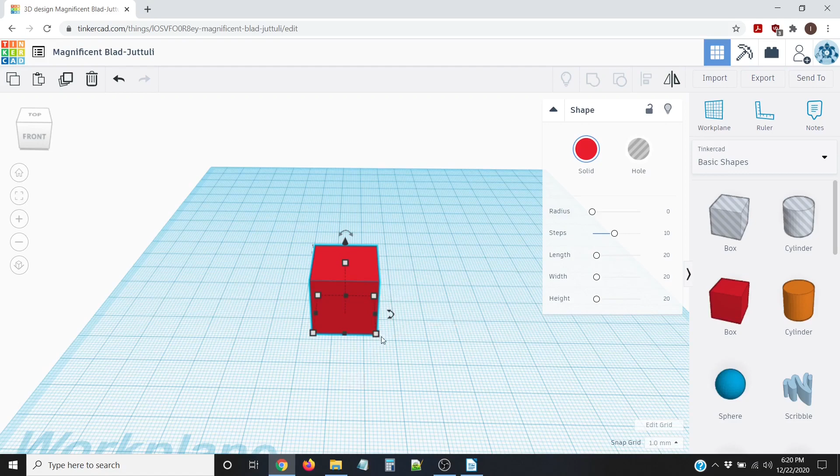This is where you take your shape like that from here and you just drag it over to the work plane. And once you have it on the work plane, you can manipulate the size of it and different parameters like that. So you can actually bring it out like that. You can increase the size going up in the Z height direction like that, and grab it like this to take it up in the work plane area, and so forth. Then if you want to get rid of that, you just make sure that object is highlighted and click delete on your keyboard.

Some of the other tools over here: there's a home button. So let's say you've got the sphere and you're zoomed in really closely to the sphere, you can click on the home button to actually zoom out to a home view. That's going to basically just recenter everything for you.

You also have this view cube that you can click to change your viewpoints all around. There's a zoom function right here. But you can also use your mouse, which you will definitely want to use here in TinkerCAD to create your models. It'll definitely be frustrating if you try to use the little touchpad if you've got a laptop. It's definitely going to be a lot harder to make a model using that. So I'd recommend having a mouse.

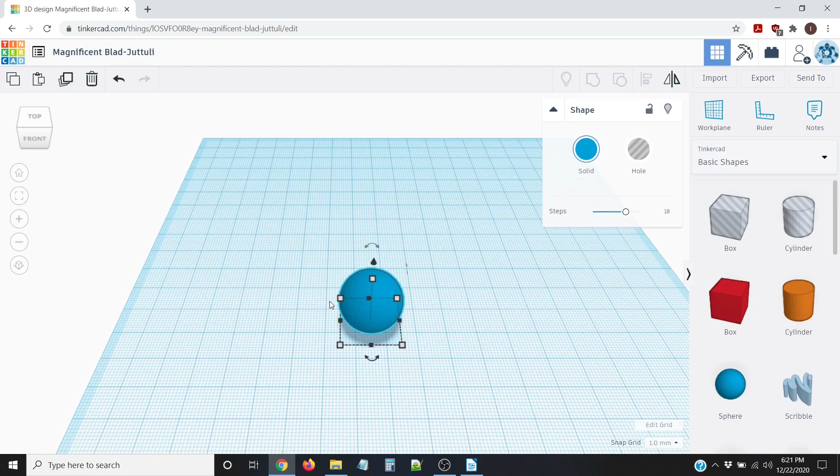But anyway, to zoom in and out, you want to use that middle scroll wheel on your mouse, pushing it forward to zoom in, and then pushing it backward to zoom out. Then the rightmost button on your mouse is basically like a panning tool, so you can pan around your model itself. If you click that middle scroll wheel, you can actually click on the work plane area. You get a panning from left to right sort of tool option right there.

The leftmost button on your mouse is actually what you're going to use to highlight items to group them together. So I will use this right now to show you. I'm going to use my left mouse button right there, and that's highlighted. I'll show you in the later part of the video how all these tools are used. But like I said, this is just a refresher if you haven't used TinkerCAD in a while.

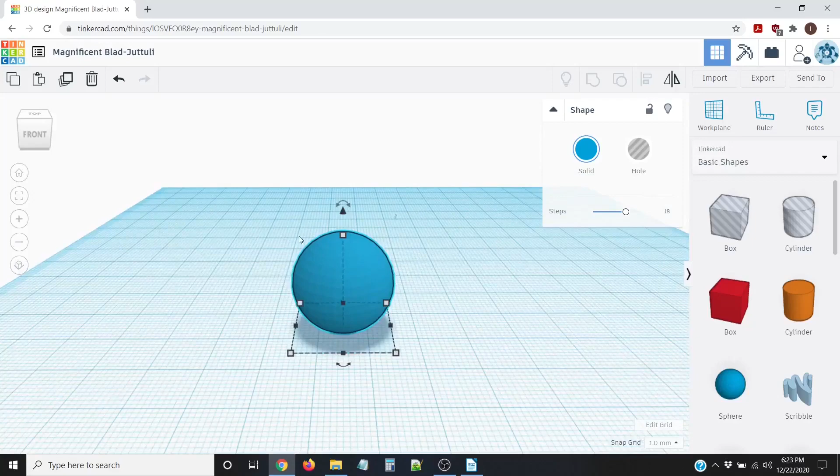And there's other tools that I'm going to use in the video that I'll slightly explain as I go through the modeling, but I'm not going to spend too much time going over the interface. I would recommend, like I said before, checking out that first video we made in December, just to get a good overview of all the tools, since there's definitely a lot of them at your disposal.

All right, so the first thing that we're going to do is 3D model a customizable name tag that can be 3D printed out. So this will be super fun, and you can get really creative with it. And I'm going to show you another option in the later part of this first tutorial using what's called the shape generators, which is over here. You've got your basic shapes. It's under shape generators, and it is the US states tool. And I'll show you how to make a customizable keychain with the state of Montana as the base for your keychain.

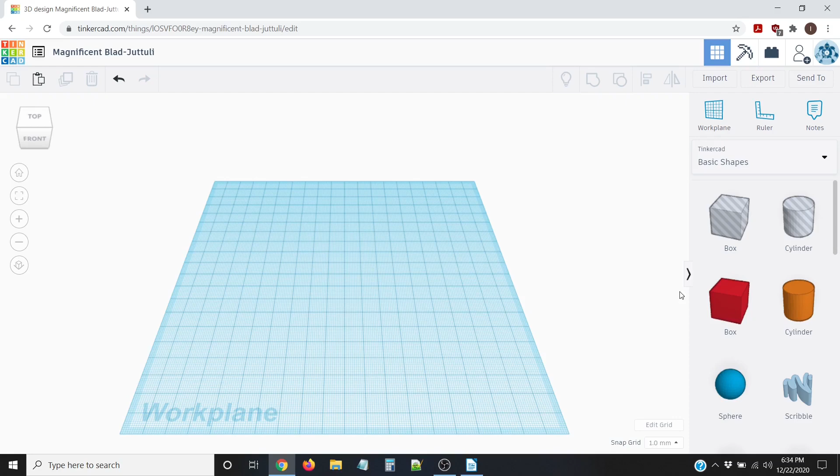All right, so before getting into the box modeling, I do want to go over one thing if you haven't modeled in TinkerCAD before, or if it's been a while: you want to use millimeters, or the metric system, when modeling. And actually, TinkerCAD defaults to that. So we're going to grab a box, bring it over to the work plane, and I'll show you what I'm talking about. This box is in millimeters, so it's 20 millimeters going this way, 20 millimeters going that way, and 20 millimeters in height going like this.

You can change this to inches if you want by clicking the Edit Grid tool down here, and then you can change your default units from millimeters to inches. I would definitely recommend, if you're going to 3D print what you're making, to keep your units in millimeters, because most 3D printers that I've worked with and that are on the market today use the metric system for their build plate area. So it's just a lot easier to do modeling in metric for 3D printing, and it's the standard for a lot of the machines that have come out of Europe and stuff.

So I would recommend staying in the metric system through this modeling exercise and anything you do in TinkerCAD. It'll just be a lot easier in terms of trying to 3D print it with the right dimensions in the future. All right, so now on to the modeling exercise itself.

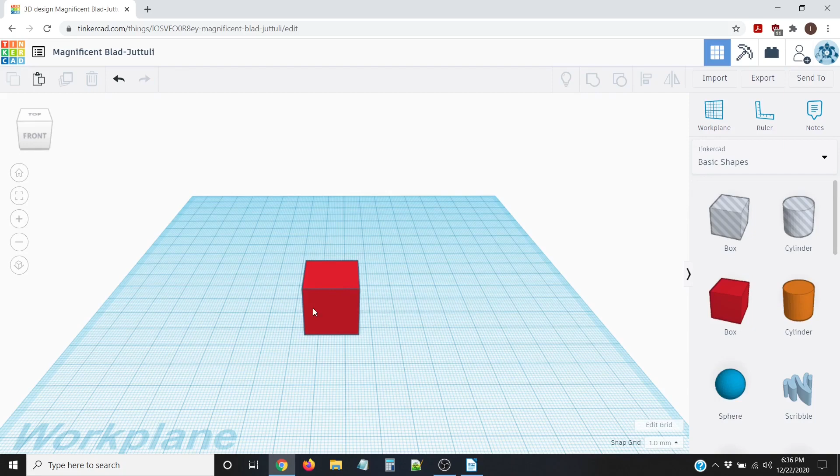I'm going to zoom in, and like we had done before, I had grabbed the box tool, moved it over to the work plane. I'm going to click on this, and I actually want to change the size of the box itself to basically mirror what a keychain would look like that you would find at any store. So what I'm going to do is change the sizing going this way to 70 millimeters. So all you got to do is click on this box and type in 70, hit enter.

I'm going to move this over a little bit using my left mouse button. You can move your object around the plane like that. And what I'm going to do now is change the size of this model going this way to, looks like 30 millimeters. I'm just going to type in 30, hit enter.

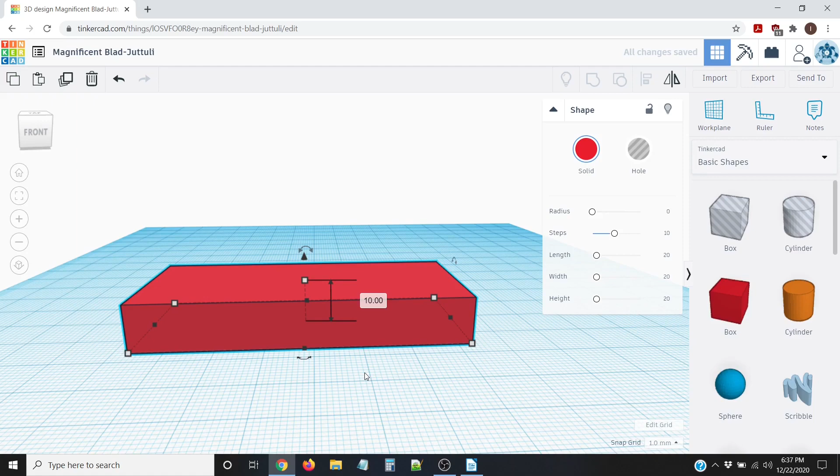And now I want to change the height of the model itself. Right now it's at 20 millimeters. If you click on that, that gives you that value right there. I'm going to click on that, and I'm going to change that to 10 millimeters. Hit enter. All right. So now I actually want to make a copy of this box and take the copy and turn it into a hole. I'll show you how to do that.

We're going to zoom out. Make sure this is highlighted, and it is, with my left mouse button clicked on it. And we're going to use the tool called Duplicate and Repeat. So you can click that tool to duplicate and repeat this model. What you can also do is use the keyboard shortcut Control D, which I'm going to do.

I'm going to rechange my view right now. I'm going to use my right mouse button and kind of move this up like that. And I'm going to do Control D on my keyboard. And so a copy has been created, and I'm going to use the arrow keys on my keyboard to move this copy just slightly out of the way. I'm going to use the rightmost arrow key, move it out like that. Now what I want to do is turn this into a hole. So I just need to click on hole.

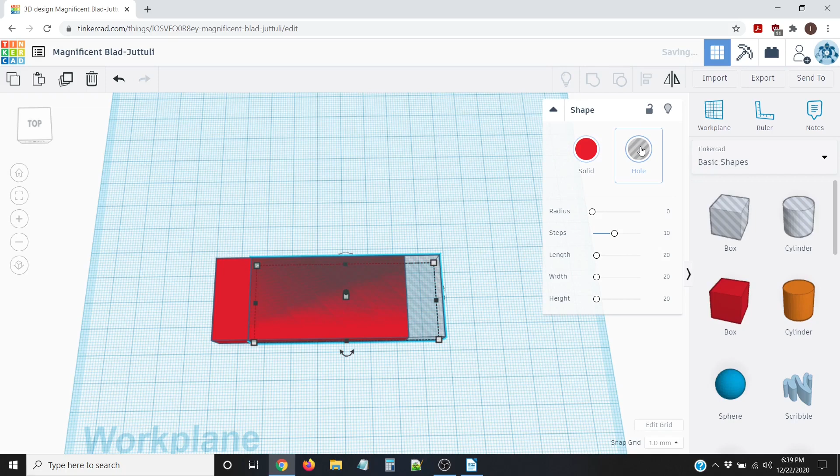Okay, so now we're going to move this box that we turned into a hole just over to the side like that. Now we want to change the proportions of this and actually round off the edges. What we're going to do is use these tools up here to do that. To round out the edges of the box, I'm going to change this radius up here from 0 to 5. I just click on that, type in 5 like that. And now you can see it's more of a rounded out shape, more like a keychain that you would find for sale at any grocery store.

Right, so now what I want to do is take this box that's a hole, and change the size as well as the radius. I'm going to change the radius from 0 to 3, and I want to change the size ever so slightly. I'm going to change it down from 70 to 60. I'm going to change this length to 20 millimeters, hit enter.

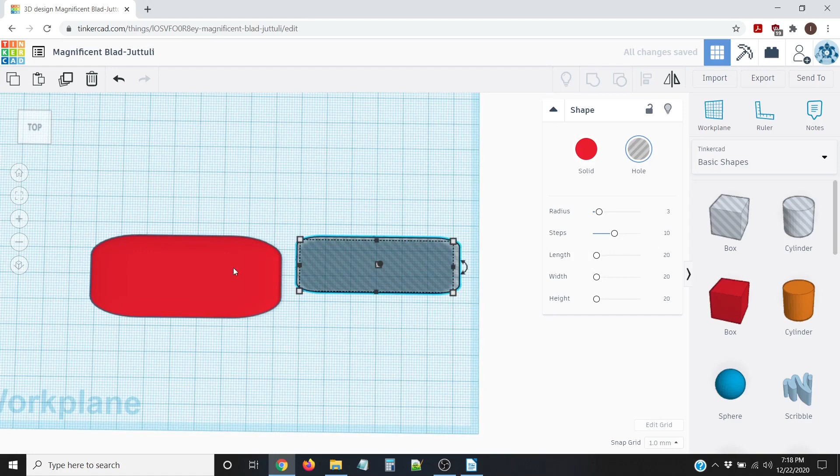And then I want to align these two together, so I can basically line this up and have this cut into this. So I'm going to highlight both of these. I'm going to use my align tool up here to align the shapes. I'll click that. And I want them aligned by clicking right there, like that. And then I want them aligned going this way, clicking right there on that model.

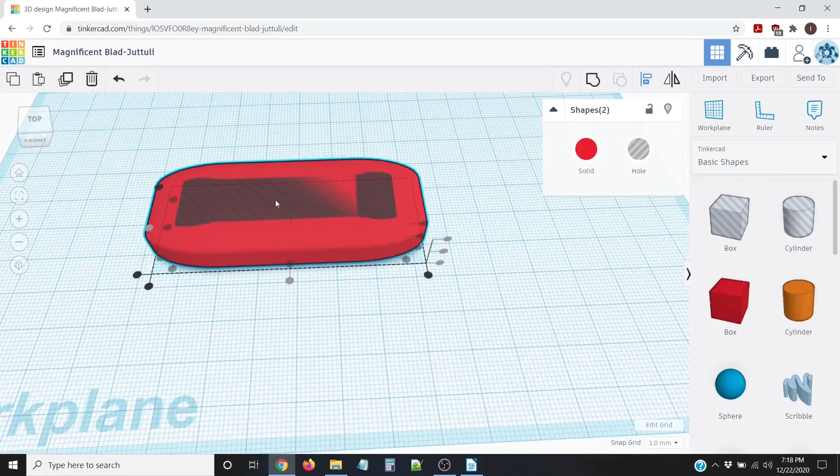And then if I click right there, that little align tool, that will align this to the middle of this. So click that. So now that's aligned, and it looks like we will actually want to change the size of this. I'm going to click out on this side to get out of the align tool. And I'm going to click on the hole box right there. I'm just going to change this size a little bit. I'm going to change it to, let's see, 65.

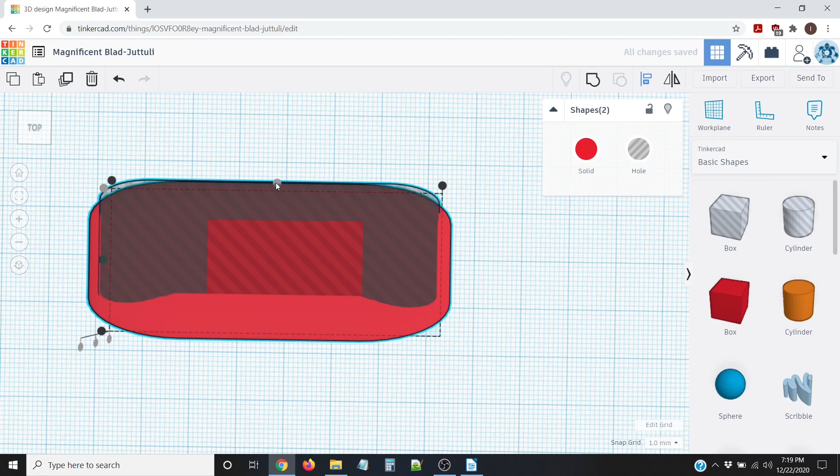Tab over, you can click the tab key on your keyboard and then change this size right here to, let's see, I'll do 25. Let's see if that works. I'm going to realign these as well. Let's see if this will fit. So I'm going to highlight both of these, click the align tool, I'm going to align them, clicking right there, and then clicking the middle button right there. So this hole should be aligned to the middle of this.

So now, you can kind of see what's going to happen: this hole is going to cut through this outer shape that we made. It's going to actually cut through the bottom, as you can see. If you scroll down this way, below the work plane area, you can see that. What we want to do is just slightly move this hole object up a little bit in space so it doesn't cut all the way through the bottom of this object.

I'm going to zoom out just slightly. I'm going to grab this triangle tool right there and just move it up ever so slightly, a couple millimeters. Let's go to 3 millimeters. Now I want to check the bottom of this and see if it's going to cut through. I don't think it's going to cut through. It looks like it might. We'll try it out and see how it works.

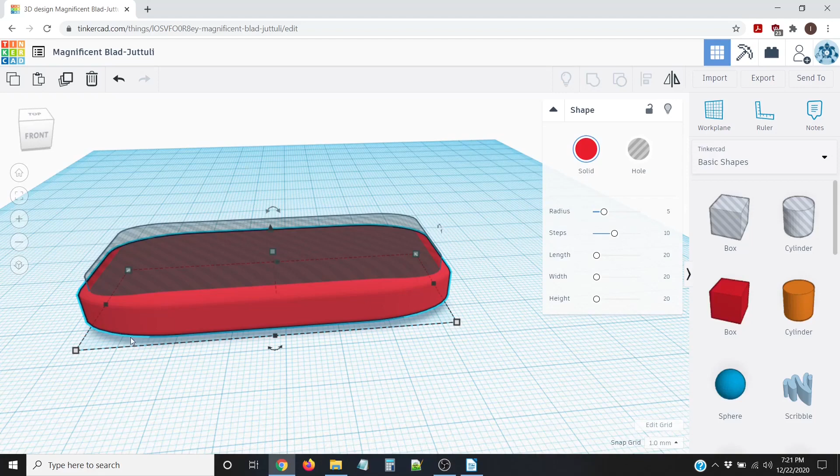So now we want to group these and see if this hole shape right there is cutting through the bottom of this. So I'm going to highlight them both, click on group, and as you can see, it actually did not cut through the bottom of that. So that's actually pretty good, but it's leaving a little bit more of a hole in there than I want. So I'm going to click on undo. And I'm going to click on this and move this up just a little bit more, so it's going above this object.

Now I just kind of want it to cut into this object or merge into it just by a few millimeters. So I'm just going to take this, move it down ever so slightly, going a few increments of -1 millimeter each. And I think this should actually work going to -3. Look at that. The height of this is 10 millimeters, so it's just going to be cutting into this by 3. So that should probably work for our purposes.

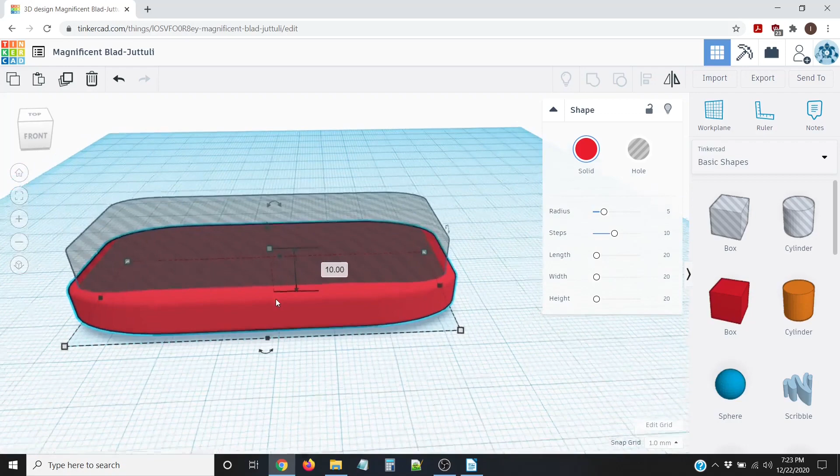So now I'm going to highlight this again. I'm going to group them. So they're highlighted, click on group. Now as you can see, the hole into this is not as deep as it was previously. So that should really work well for a name tag.

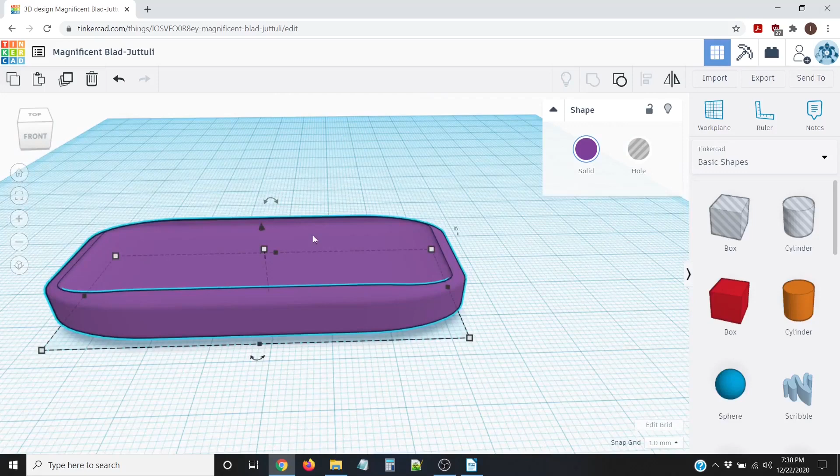Now I'm going to change the color of this to see a little bit more of the contrast inside there. So from red to, we'll try this purple right there. I guess it didn't really change it too much, but you can kind of get the idea of the hole that we made of that box cut into this.

So now we want to customize this by adding text to this area in here. We can do that with a tool called the text tool, which is over here under basic shapes. It's this tool right here. There's also a couple other text tools you can use. If you click on this drop-down menu, go down to the shape generators and click on all. On page number 2, you have a couple other text tools: custom font text, script text, and a text ring that basically creates text in a ring around a model. So that's another option for using text in Tinkercad.

I'm just going to go back up to basic shapes. I'm going to use the text tool in this area. I'm just going to grab this, move it over here. So as you can see, when it gets brought over to the work plane, it's actually pretty big, so we're going to have to resize it. First, I'm going to change the text itself. I'm going to change it to my name for today's purpose. My first name is Ira. I'm going to do IRA, like that.

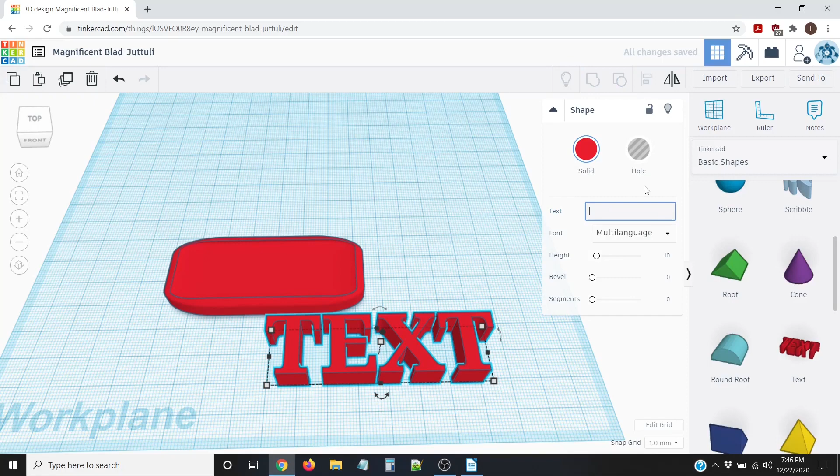Right here you can see you can change the font. So right now it's under what's called multi-language. You can see what all of these look like just simply by clicking down here and seeing how it changes the font. And yeah, that's what it looks like. So I'm going to go with the serif. I kind of like that. It's like an old school looking font that works well for this.

So now what I want to do is align this text to that, and I'm going to have to resize it as well. We'll first align it. So I'm going to just move this up like this using my left mouse button, and then I'll move it over to this area where this model's at. And then I'm going to use the align tool from there. So I'm going to highlight these both.

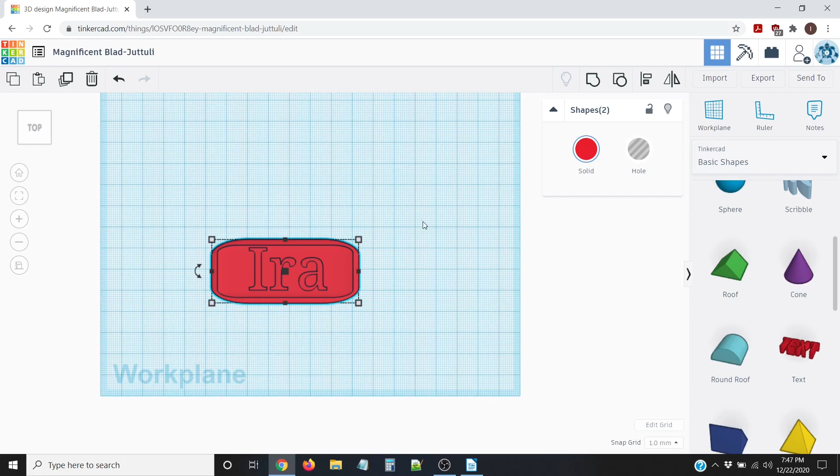To resize my view, I'm going to click over here on the top view. One thing that I found too is that you can switch your perspective views, so I'll switch it to a flat view called orthographic. That's really good for lining up different elements that you're combining together. And you can actually see what it looks like. It's kind of weird looking initially, like I wouldn't probably generally model in this view type just because it's less normal or intuitive to me, but it's really good for lining up things like text or different objects together. We can get out of that view by clicking over here to perspective view. Click that, and that just gets you back to the basic 3D modeling perspective view.

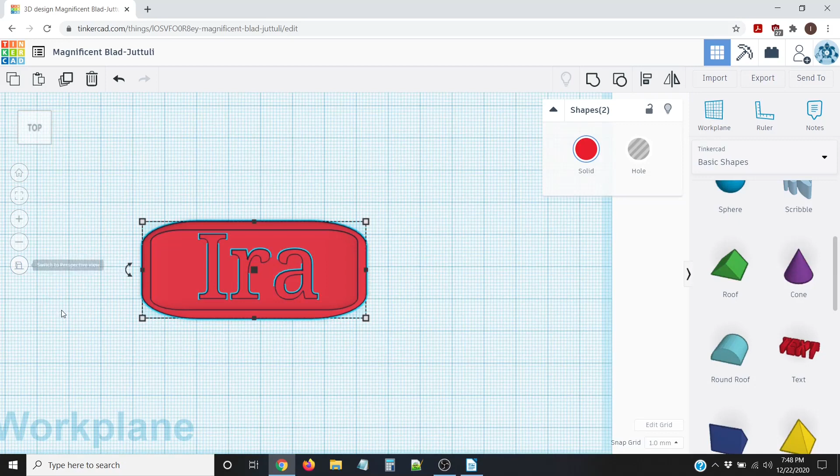So now what I'm going to do is click this top view cube button right there. I'm going to click into the flat view. And now what I want to do is highlight these both, go up to the align tool, and make sure this text is nicely aligned to this larger model. So I'm going to click over here to align it this way, and then click it right there to align it to the middle of this going that way. So that looks good right now.

So basically what we can do is merge this text into this model, or I can actually have it cut it out. First, what I want to do though is change the color of both of these just to give a better visual contrast.

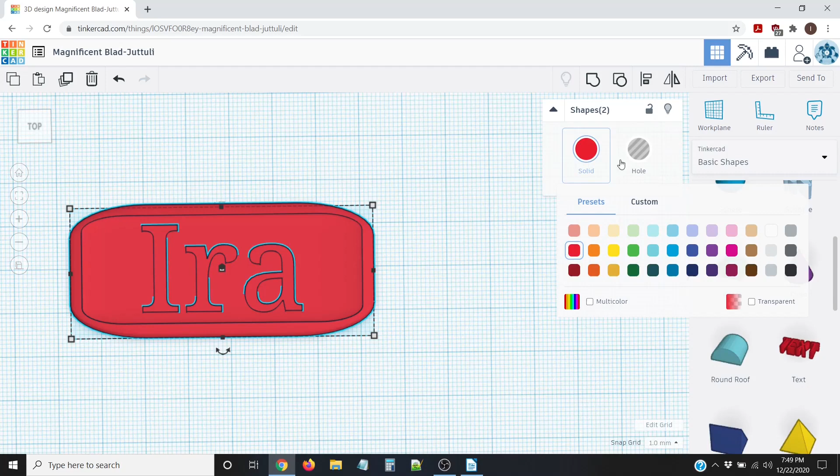I'm going to click on solid right there. I'm going to change these to like a lighter blue. And now what I can do is zoom in like this, and you can actually see that this model is just slightly merging with this, but I think it's actually cutting through down the bottom here. I'm actually going to change my view back to perspective, and I'm going to pan over like this.

Actually, I think what I'm going to do to give both of these a different contrast is change the color of the text. So I'm going to click on the text, change it to, I'll just do black. And now we can see, I'll click on this, you can see by using this triangle tool, you can merge the text into the model like that. And you can actually have it basically cut through the bottom if you'd like.

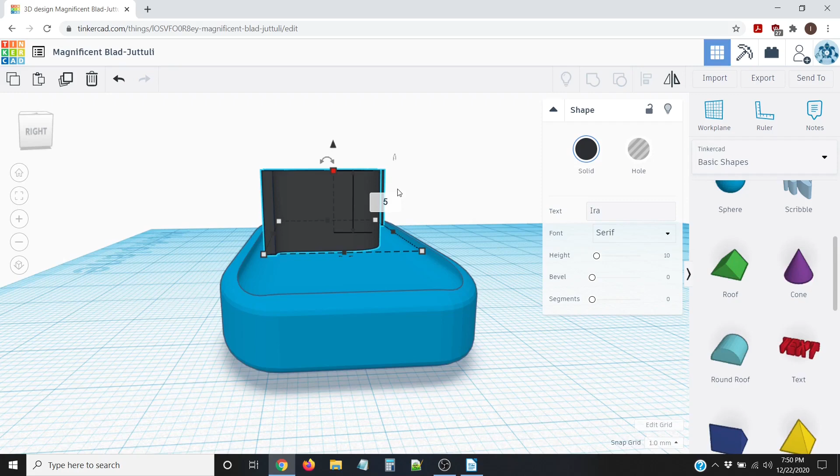What I'm going to do is resize this text by moving it up like this, clicking this, and make it, let's say 5 millimeters in size. You can even do, let's do 3. Hit enter. And now I'm just going to slightly move it down until it basically starts merging with this part of the model. You can zoom in to get an even closer perspective on it.

And we'll see, it's still on the top of the model, hasn't merged yet like that. But if I just push this down one more, so now it's merged with this model. We can zoom out, pan over like this, zoom back out again, and let's combine these two.

So I will highlight these both. I'm going to combine them by grouping them. So I'm going to click on group. And now they're grouped as one shape. So when this is 3D printed, it's all going to be printed as one shape.

Now I'm actually going to show you how you can create the text as a hole, or turn the text into a hole, so it actually gives you kind of like an imprinted look into this model.

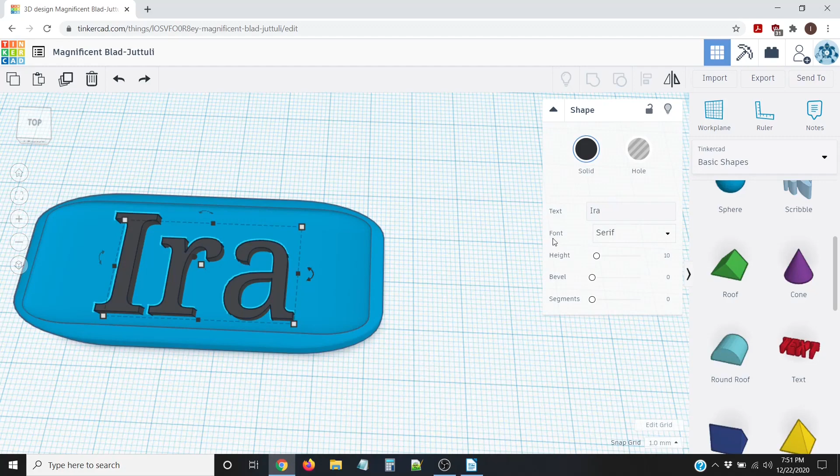So to do that, I'm just going to click on the undo tool. So now they're two separate objects. They're not merged, they're not grouped. I'm going to click on that text and make it a hole.

Now what this is going to do, once I group these, is show that this text is cutting into this model. And I'll show you what it looks like. It's actually really cool. We'll highlight these both and click on group. As you can see, the effect is it's cutting into that model itself, and it will 3D print like that and should look pretty good. It's kind of a cool visual effect.

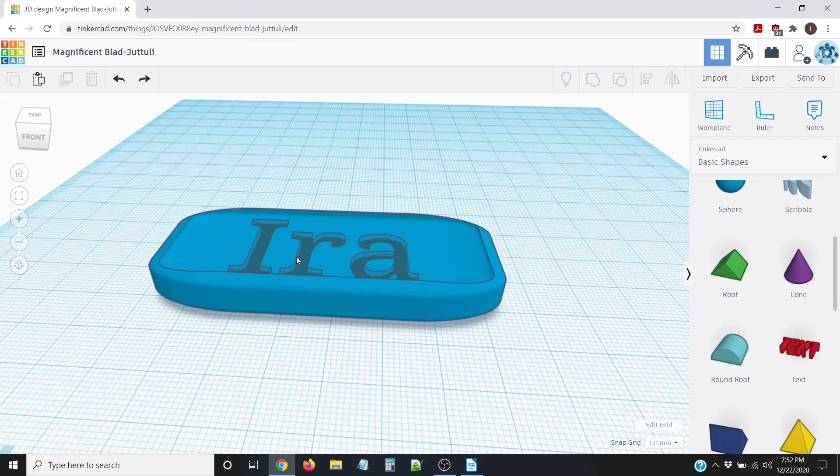So that's another option for merging text into your models. What I'm going to do though is undo this, and instead have the text move up in space from this model, giving you the visual effect that it's popping up from the model.

So I just did the undo button. I'm going to click undo again, and then undo one more time. So now we're back to the same model we had before, where this text is merged in with this model, so it looks like it's popping up from it.

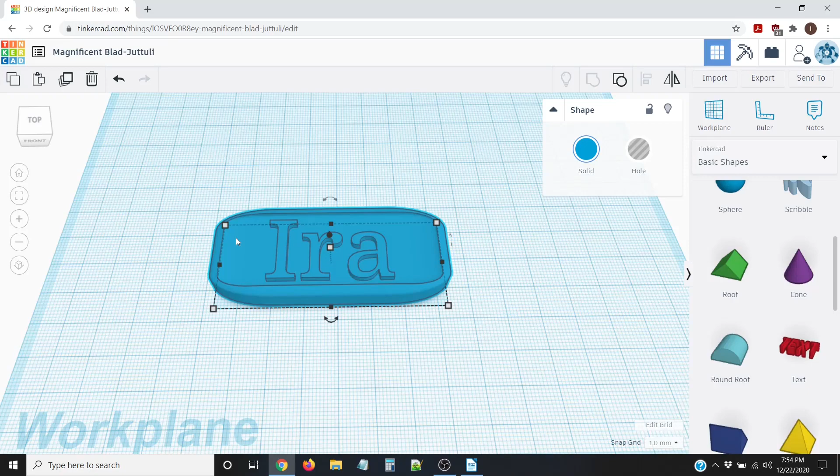So what we're going to do is highlight these both and group them again. You can see right now they're made up of two shapes, so we'll group them, and now they're merged as one. For the final step, we want to create a little circular hole in order to use this name tag to hang up on things, or add it to a keychain, or any sort of thing you want to personalize and hook this name tag onto.

So we'll click off of the model on the work plane. We're going to move over here to the basic shapes we've been using, and look for the torus tool. You can also use the tube tool for this, but I'm going to use the torus tool.

I'm going to move this over like this. I'm going to change my perspective with the view cube to top, and actually change my perspective to the flat, or orthographic, view. Click on that, and click on the outside like that. I basically want to align this to that, so it lines up perfectly.

So I'm going to highlight these both and click on the align tool up here. I just want it to basically align along that part of the plane. So I'll click on that, and it's aligned right there.

Now what we'll do is I'm going to click on this. I'm just going to change the color of it to make it easier for me to see as I'm merging the models. I'll change it to, I guess, brown. And I'm going to zoom in, using my middle mouse button to pan over slightly.

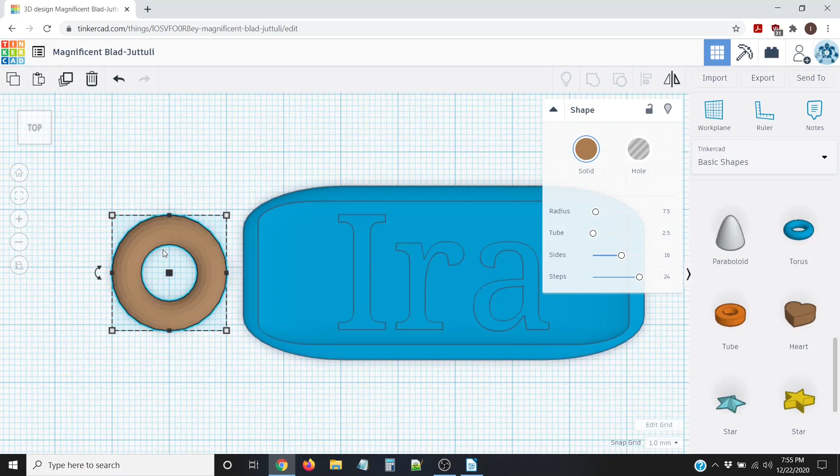I'm going to use my right arrow key on my keyboard to push this in like this, just so it's slightly merging. Now I'm going to use my right mouse button to pan over like that. I basically just want to use the upward key on my keyboard to push this model in ever so slightly, just more into this model. So just like that.

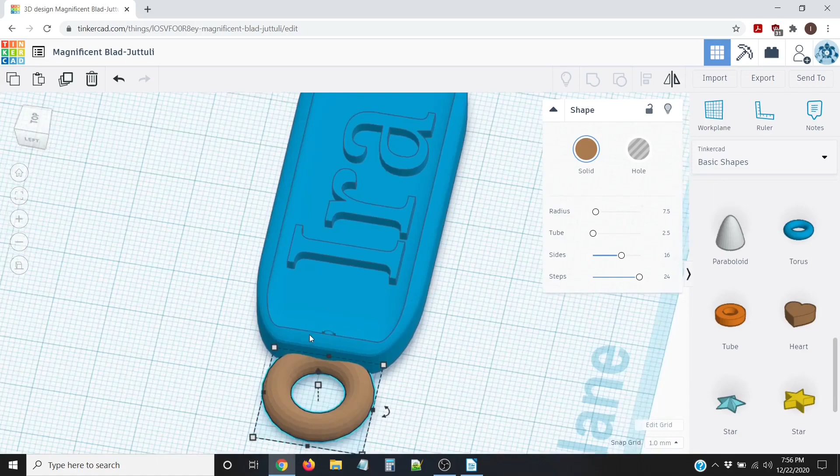You basically just want these two to merge together, so when they're grouped and then exported out to get 3D printed, they will actually print as one object, so this won't be a separate thing printed off from this. If that happened, you'd just have a failed print. So that looks good, pretty well merged into this.

What I can do, if I want to move this in even more but not in such large steps, right now it's going in increments of 1 millimeter inward. I can change the snap grid tool to 0.1 millimeter, which gives me a bit more finite control of my movements. So if I press the upward key on my keyboard, you can see it's just slightly going into that model more.

So now I'm going to change my view up again, zoom out, and switch my view to the perspective view.

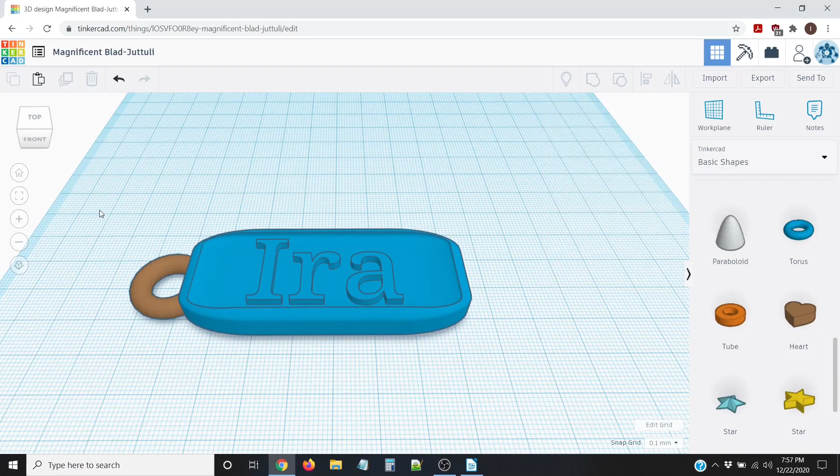Use my middle scroller mouse button, click down on it, and move this over to slightly pan. Then I'm going to highlight these both. I'm going to click on the group tool, and now both of these are grouped.

What you have now can be exported out as a STL file, which is what our 3D printers like to take as the file type. This should print out very well on our 3D printers. You can customize your name tags with all sorts of text to make it customizable for yourself or your friends.

And then this little Torus tool that we used right there, that we merged with this model, you can use that to actually clip onto a keychain or hook onto whatever else that you like.

One thing to note too, when you're grouping objects together and they're different colors, if you haven't watched that previous TinkerCAD video, I'll mention it now: any color that you choose to make your solid shapes in TinkerCAD is not going to affect the color that it's 3D printed in. When you export these files to get 3D printed, all it's taking is basically the information about the shape and text as part of the model. It's not taking into account the color of the model itself that you made in TinkerCAD. It actually can't handle that type of information, unfortunately.

So our 3D printers would not be able to understand that you exported this out as a blue color. You would actually just have to let me know that when you send me the file through email to have me print it for you.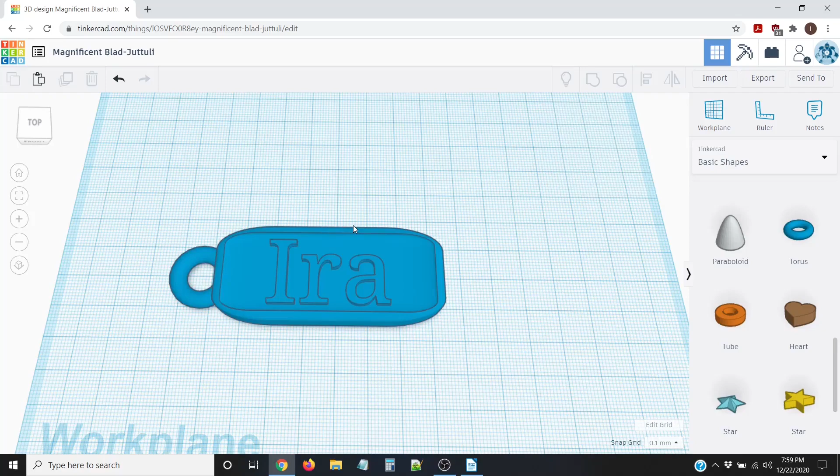So when you're happy with your model, which I am with this, it's super simple, but it should print really well. What I can do now is highlight this, click on it with my left mouse button, click on the export tool, and basically I want to choose the selected shape.

That's selected, and I want to choose the STL file format. That's really the most popular file format that our 3D printers can take to print out. So I would click on STL file, save it, and import it into the 3D slicing program, which is the program we use to load in files and set them up for 3D printing.

Before we move on to the next portion of this tutorial, I also want to note that up here, if you haven't played around in TinkerCAD before, this is where you can rename your models. Anytime you create a new model in TinkerCAD, it's going to give you its own made-up name, so you can click up here and change that to whatever you'd like. I'm going to call mine Ira name tag.

Once you click export and export it as an STL file type, it's actually going to save as the name of the model that you called it. So it's super helpful, especially if you're working on tons of different models and want to keep track of all the things you're creating.

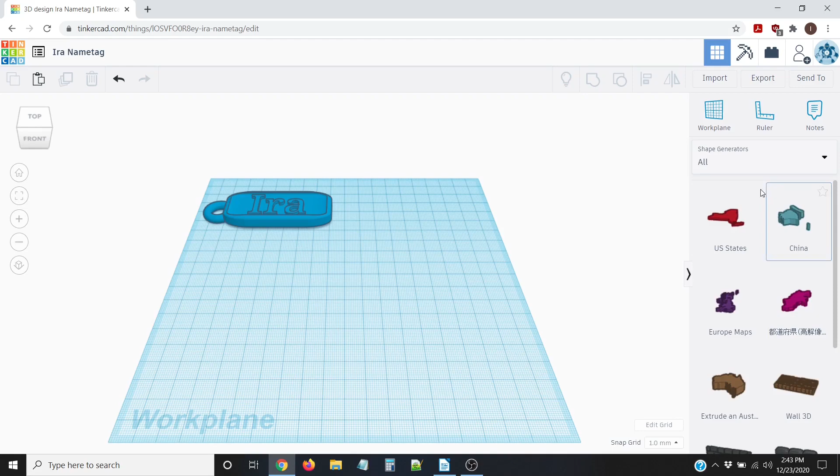For the next name tag model, or keychain name tag, we're actually going to get out of the basic shapes and go to a special area called shape generators, which are made by users of TinkerCAD and the company that created TinkerCAD. They've got a really cool set of shapes of US states.

So if I grab that shape right there, you'll see it's the shape of New York State. I'll click this and go down to Montana right there. As you can see, that is the state of Montana where we live. I'm going to choose the top view up here.

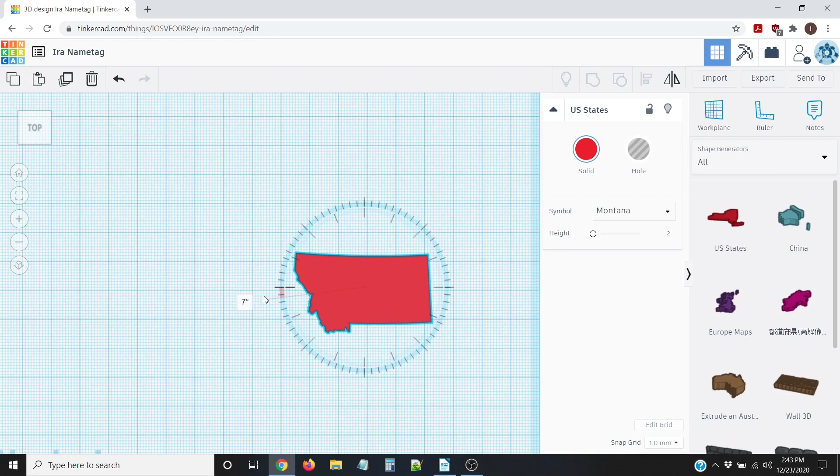What I want to do is use this rotate tool to rotate it around, but not the rotate tool where I've got my mouse pointer, because it's a fixed grid of 22.5-degree angles that it moves at. What I can do is click this and move outside of that area to rotate at free-handed angles. So I'm just going to change this so it's more left to right, straight on. And then I'm going to change my view from the regular perspective view to orthographic.

And what I'm going to do is I want to make this bigger, but I actually want to keep the proportions of this model. So I'm going to click first Shift on my keyboard, and then I'm going to click down here on that box, and I'm going to move this model out like that. And I don't have a particular size in mind. I'm just going to go to kind of where I like it. So I like this size for this model.

That looks pretty cool. So now I'm going to move back to the perspective view, and I'm going to go up like this using my right mouse button, and I'm going to zoom back out. And I want to kind of figure out either if I want to use text or numbers on this. And I think what I'm going to do is I'm going to put the number 406 on top of the state of Montana. That's our area code.

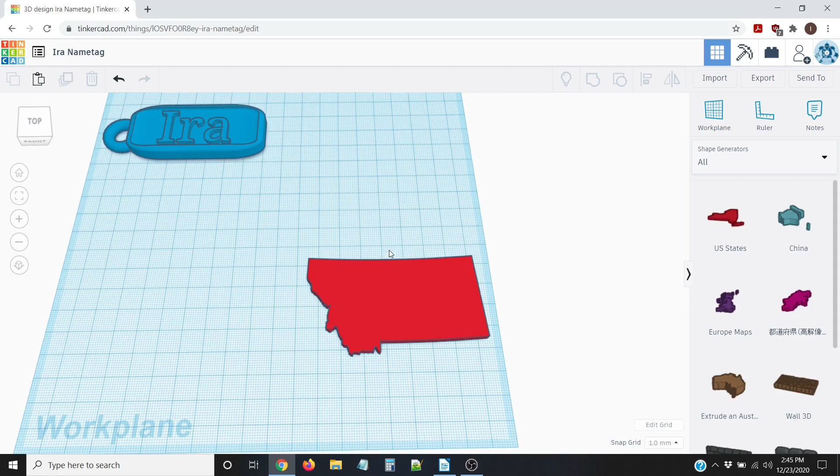If you use a phone, that is our area code. If you've got family from out of the state and they want to call us, they got to use the area code 406, which is our phone number area code. So I'm going to put that on top of this. And then after that, I'm going to put a little circular thing up there so it can actually be hung, either as a keychain or maybe you can have it as an ornament or something like that.

So now what I'm going to do is I'm going to get out of the shape generators area. I'm going to go back up to around near basic shapes and go to text and numbers. And I'm going to use this text tool. Right here you can do individual letters and numbers, but I found that using the text tool itself actually is a bit quicker. So I'm going to grab the text tool, move it over right there, put it on top of the state of Montana.

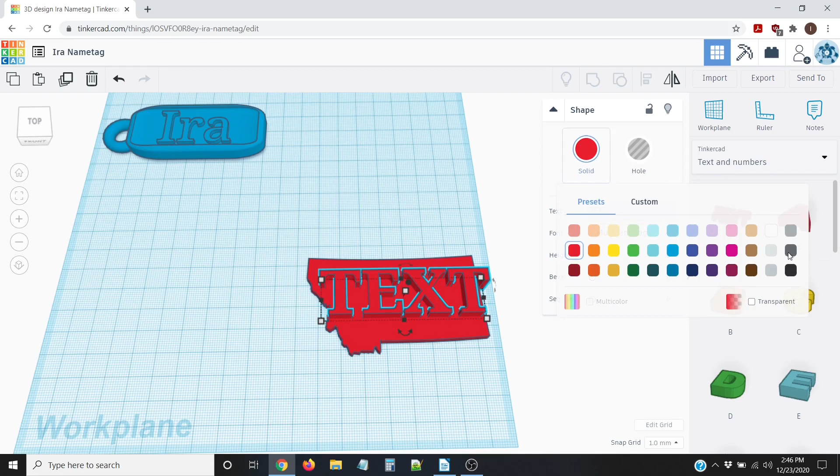And I'm going to change the color just so I can see a better contrast between the two models. Change it, I'll do a light blue. So now what I want to do is change the text from saying text to 406 for the state. And I like how that's looking. I'm going to change the size of it by clicking right there, and I'm going to make it 5 millimeters just by typing in 5, hitting enter on that.

And what I want to do actually is I want to try to center this onto this model. It looks pretty centered, but it might need a little bit more work. So I'm going to highlight these both, go up to the align tool, and click this to align it, and then click this to align it. And so that is relatively aligned to the middle, even though maybe it doesn't look like it, but that looks good to me.

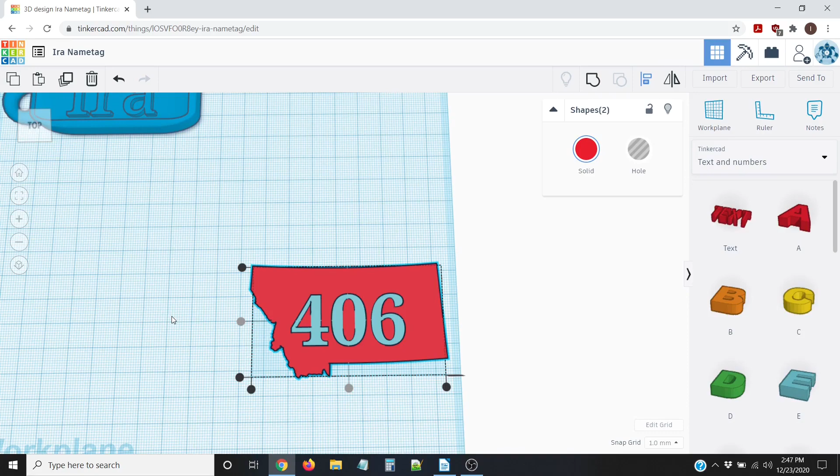So the next step I'll take is I want this to cut into this model. So I'm going to click on the 406. Instead of having it be a solid, I'm going to click on hole. And then I want to use that tool right there, that little cone kind of shape, and move it up in space like that. And as you can see, it's above the model now.

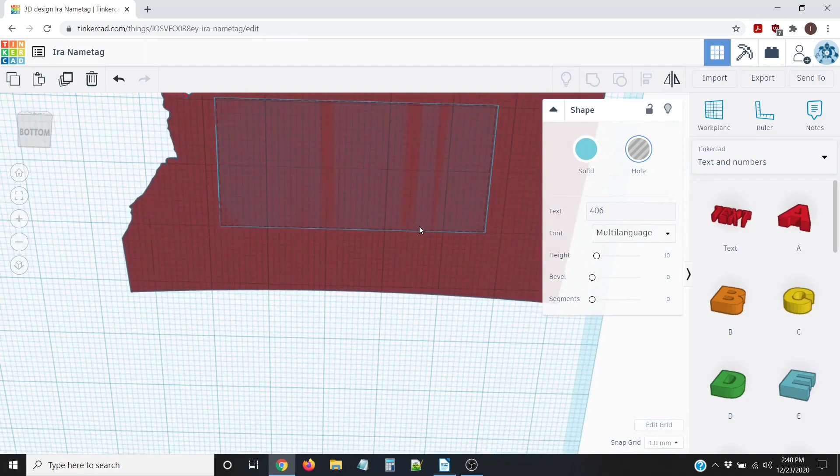What I want to do is I'm going to grab this and just slowly move this into the model, and I want to make it so it goes into this and merges with this model, but it doesn't cut through the bottom. And it looks like it's not doing that, so I think we're kind of perfect in terms of how it is merged with this main model of the state of Montana.

So now what I want to do is use my left mouse button and highlight these both. I'm going to click on group. And I like that. That should look pretty cool when it's 3D printed. That's a really cool effect. So now to finalize this, I want to go up here, and instead of being in text and numbers, I want to go to basic shapes.

And I'm going to switch it up this time, and I'm going to use the tube tool instead of the torus tool. So I'm going to move this over to here and zoom in, and I want to just double check the height of this model. I can click right there. So it looks like this is 3.38 millimeters. I'm actually going to up that to 5. So I'm going to click that and type in the number 5.

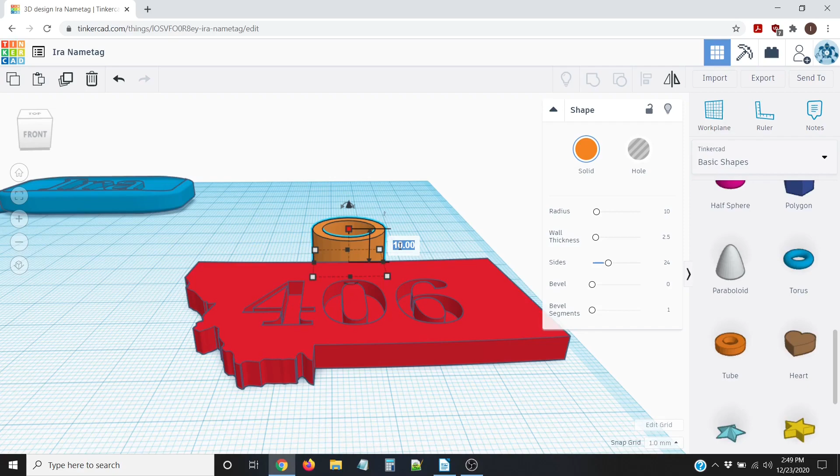Now what I want to do is I want to make the height of that little tube shape the same as this. So I'm going to change it to 5 millimeters just by typing it in like that. And then that tube size is a little too big for my liking. So I'm going to click on the shift key on my keyboard, and I'm going to click right there, that box, and just resize it a little bit. And it's going to keep the proportions of this so it looks nice and not wonky. So that's a good size right there, I think. 7 millimeters for this way and this way.

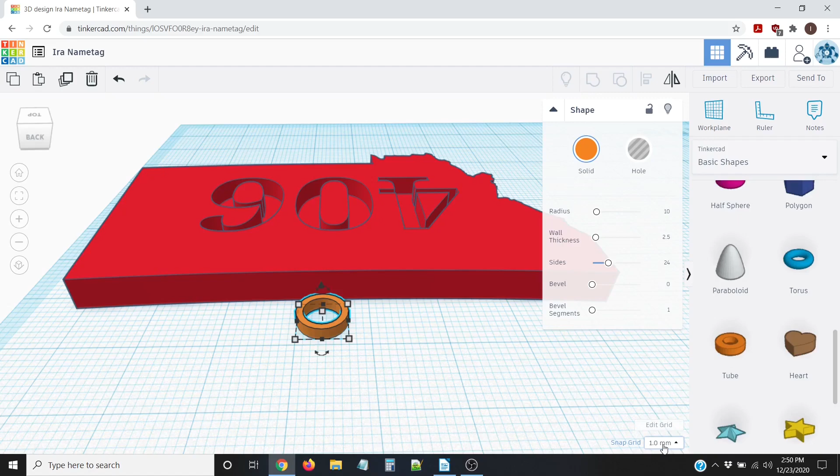Now what I want to do is I want to grab this model, move it down like this, and then I'm going to switch my view. I'm going to pan around using my right mouse button like that. And I want to merge this with that. So what I can do is click on that right there. I'm going to change my snap grid right now to 0.1 millimeter. I'm going to change my view, pan up a little bit.

I'm going to click this model again, and then I'm going to use the up arrow on my keyboard to just kind of slowly merge it with the model like that. I'm going to zoom in to get a better look at it, and that looks pretty good. I might move it out just a little bit. So that should actually work being 3D printed.

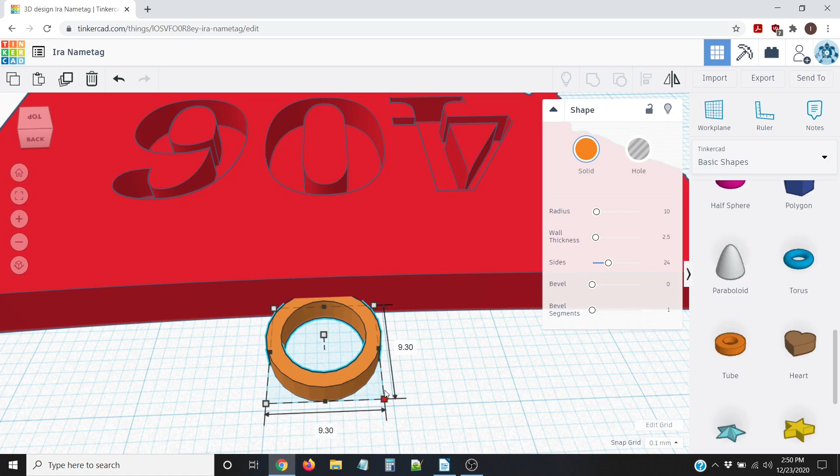What I might want to do though, just to make sure this has enough strength, I'm going to increase the size of this from being 7 millimeters to maybe like 8 or 10 or something. So I'm going to click on Shift. I'm going to move this out like that. You can see it's moving in small increments. I'm going to change it to 10 millimeters just to be safe.

So now what I'm going to do is I'm going to use my up arrow on my keyboard and just slowly kind of merge this into that, to where it basically reaches this point just before this shape and that part of the shape meets. So this looks pretty good. I'm going to zoom out. I'm going to change my view. I'm going to go to the home view, click that.

And now what I want to do is I want to group that with that. So I'm going to highlight them both using my left mouse button. Click up on group. And now they're all grouped as one shape. And they should 3D print really well. And it's a super flat surface, so it should print really well on the 3D printer build plate.

So that is how to do a second model name tag or keychain holder, whatever you'd want to call it, for practical 3D printing purposes. And as you can see, you can use a lot of different shapes as the base for your name tag or keychain model. You can use the state of Montana. Go into the shape generators. You can click around. You can use different countries.

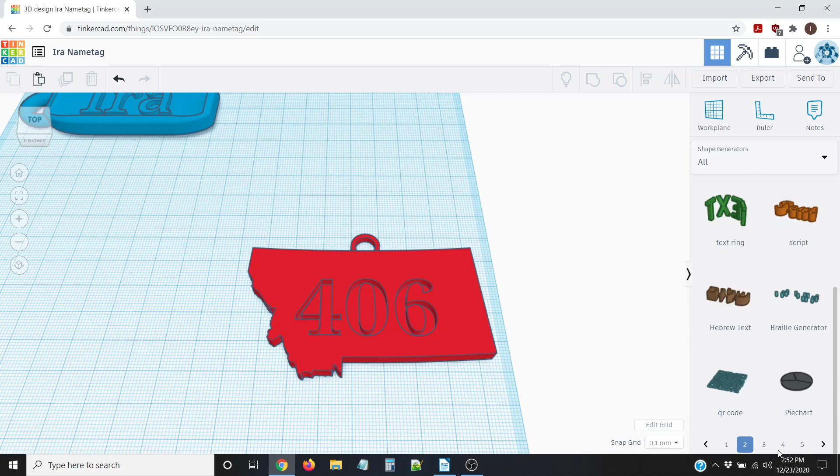Yeah, there's lots of options. You can add different kinds of text to it as well. You could do a flower. This flower shape is your base. So you're really just limited by your creativity and what you'd like your name tag or keychain to look like. So thanks for tuning in, and now we'll move on to the next model.

Okay, so the last thing we're going to make today as part of this tutorial series is a phone stand holder. It's going to look something like this. We'll scroll to the side like this. So as you can see, it's something where you can actually set your phone up going upwards this way or on the side going this way to watch educational YouTube videos like this, or if you like to read ebooks, or if you need to use your phone to do homework.

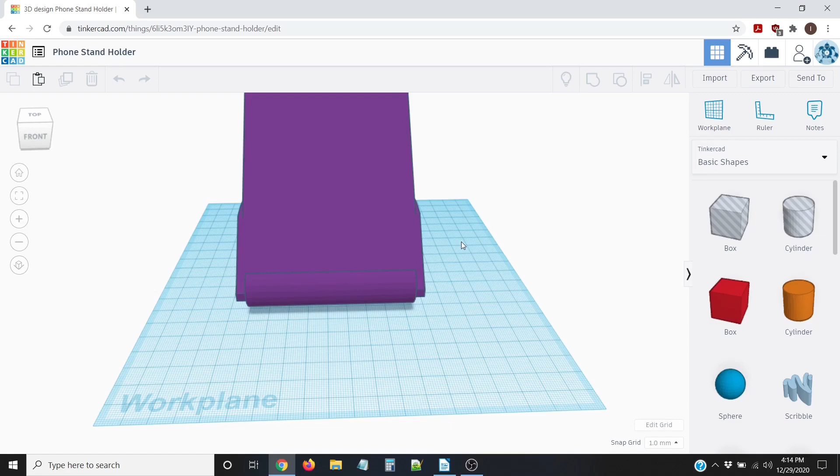This also might fit a smaller tablet. I haven't printed it out and tested it yet, but that's something to explore too. But for this last lesson, we're going to make something similar to this, so you can 3D print it out and actually use it to hold your phone and perhaps a tablet as well. So stay tuned.

All right, so the first thing that we want to do is create a model of your phone to make sure that it works. So I have a Motorola Android phone, and I figured out my dimensions by taking a tape measure and using the bottom part of the tape measure, where the numbers are in metric, so in millimeters.

So if you've got a tape measure at home and you're not totally sure how to use it, one of your parents can show you what I'm talking about. At the top of the tape measure, you can see it's all set up in inches. At the bottom of the tape measure slide piece, you should see that all the measurements turn into metric.

So we'll want to measure our phone in the metric system because for 3D printing, that's the easiest way for 3D modeling software and 3D printers to understand the models that you create. So I took measurements of my Android phone, and I'm going to make a simple model of it to help us make this phone stand.

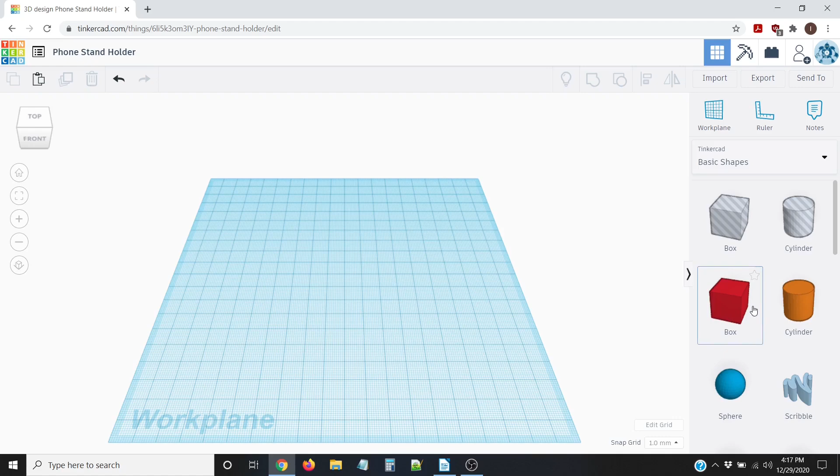So first I'm going to grab a box, move it out to here, and change the sizing of it. For the length going this way, it is 165 millimeters. So I'm going to click that, type 165, hit enter, and move this up like that. Then I'm going to change the size going this way, and that size is 83 millimeters, and hit enter.

Now I want to change it to the thickness of the phone itself with the little case I have on it. For my purposes, it's 14 millimeters, but I'm going to add 1 more millimeter for some extra wiggle room. So I'm going to type 15 right there. So that's your basic model shape of my phone size.

I'm going to go up to the radius and change this ever so slightly to give some rounded edges to this model to mimic what a phone looks like. Now I'm going to move this over to the side. We're not going to use it quite yet. Next, we're going to take the cylinder object, grab it, and plop it down on the work plane.

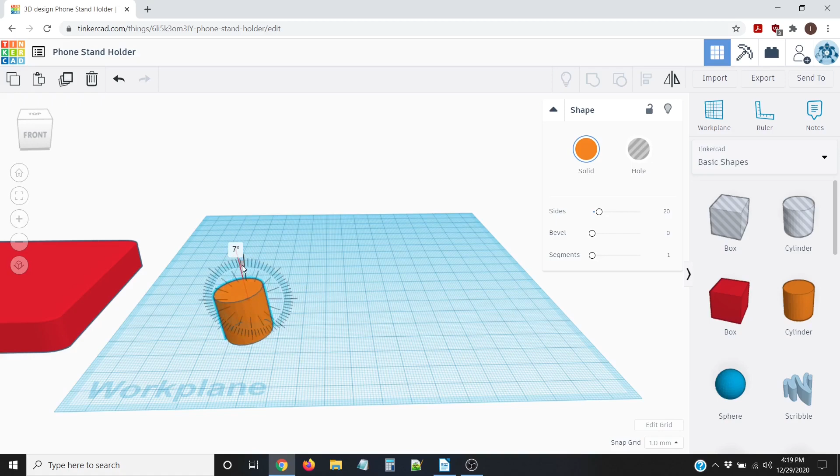Then we're going to rotate it, using that fixed rotation tool. I want to move it down to 90 degrees so it's sitting nice and flat on the plane like that. Now I'm going to increase the size of this going this way. I'm going to elongate it by 95 millimeters, so I'll click on this, type in 95, and hit enter.

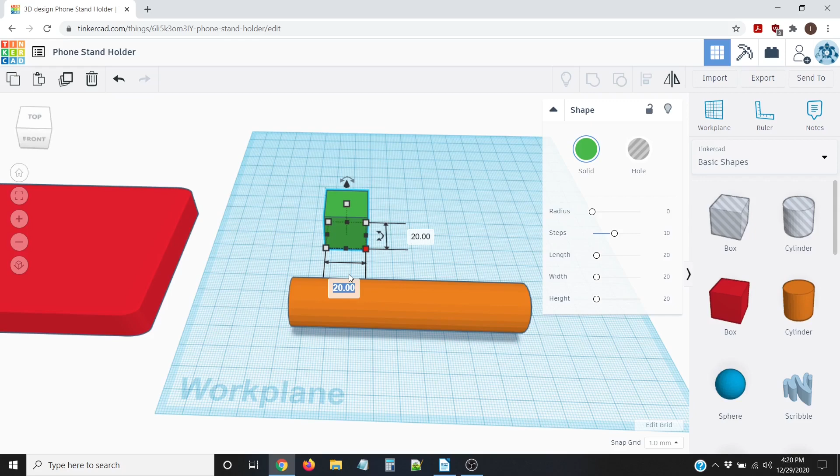Now I want to take another box object and move it over here to the work plane. I'm going to change the color of it to give it some contrast to this green. Now I want to make this object 95 millimeters this way. And then going upwards, I'm going to make this 120 millimeters. Hit enter like that. I'm going to zoom out.

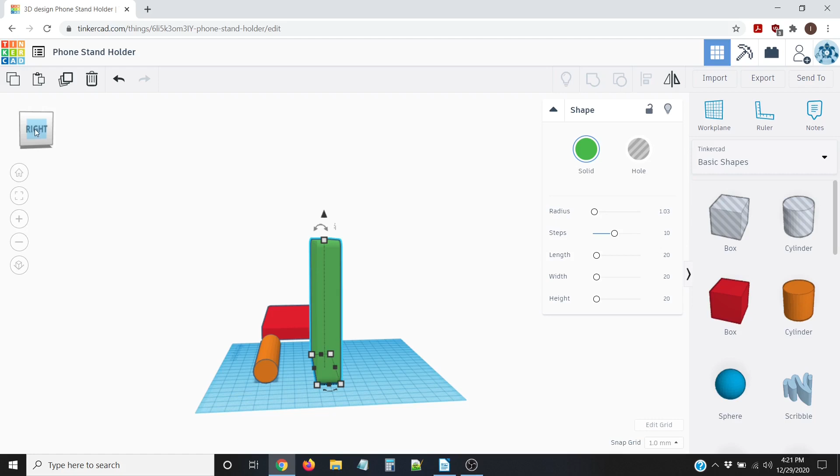Now I'm going to use this radius tool again to soften those sharp edges, and slightly move it down like that, so when it prints out, it's not a sharp corner. In terms of the thickness, going from here to there, 20 millimeters should be enough. Now I want to rotate this box. I'm going to click on this right view cube right there and zoom in a little bit.

And I want to use this rotation tool again, and I want to use the fixed rotation of this. So I'm going to click on that, and I'm going to move it down. Whoops. Zoom up, get a little bit closer to it. Click that and move down like that. I'm going to have it go in the fixed rotation of 22.5 degrees. I'm going to move it down to -45 like that.

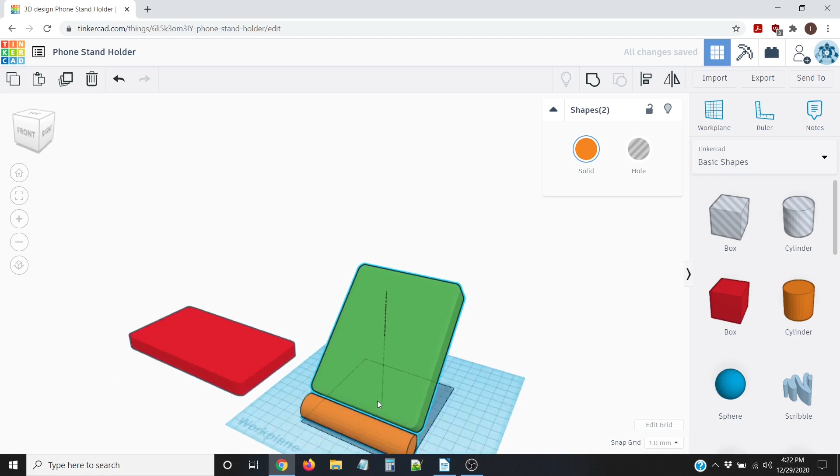So now what I want to do is try to align these two together to get it more centered. So I'm going to highlight those, click the align tool. I'm going to align them this way like that. That looks pretty good. Click out of the align tool.

And now what I want to do is just move this guy, whoops, downwards a little bit in order to just basically touch this. So I'm going to use this tool, this cone tool right there, and just bring it down just like so. I'm going to click on this object too and press the letter D, that will make this object there sit nice and flat. This part right there onto the work plane.

All right, so now what we want to do is actually create the base. That's going to be sort of the thing that really holds all of these objects together. So what we're going to do is we're going to grab the round roof object, grab it, bring it over here, just like that. I'm going to move in, change my view. I'm actually going to zoom in a little bit.

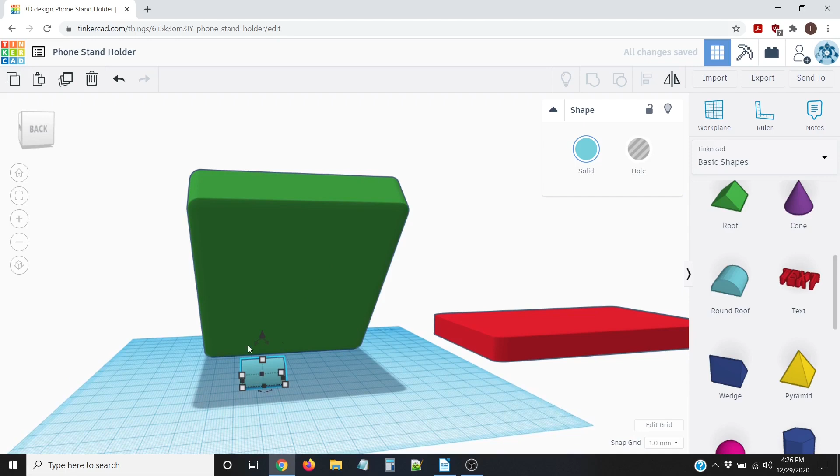Now what I want to do is I want to rotate this around. So I'm going to click on this, and I want to rotate it basically 90 degrees. So it's kind of nice and going this way, much like these. And now what I want to do is I'm going to increase the width of these to basically match these. So I'm going to make it 95 millimeters.

First, what I want to do is I want to try to align this to these. So I'm going to highlight these. Whoops. And when I grab this, I want to highlight these and make sure that's not highlighted. So now I'm going to click on Align. I'm going to just basically align this, clicking like that, so it's in the middle right there, and then that should be good, actually. Actually, if I click this, let's try that. Oh, no, so I don't want to do that. So I'm going to click on Undo for that. So we're going to just leave this right there for now.

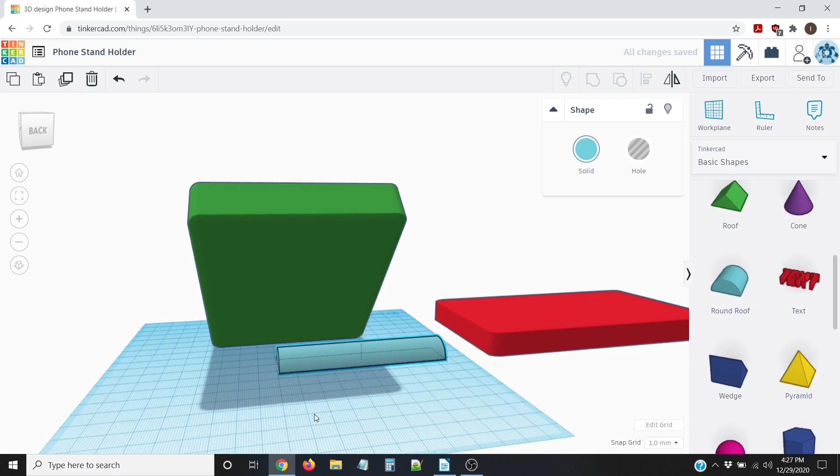Now what I want to do is I want to increase the size of this going, whoops, this way, left to right, to 95 millimeters. Hit Enter. And then I want to basically move this over and then realign it again. So I'm going to highlight these both, click the Align tool, and then align it, clicking this middle button right there. All right. And then if I click this object as well, click right there, it should align this with this area right there. All right. That's actually not what we wanted either, so I'm going to do Undo. That didn't quite work. So I'm going to click out of this.

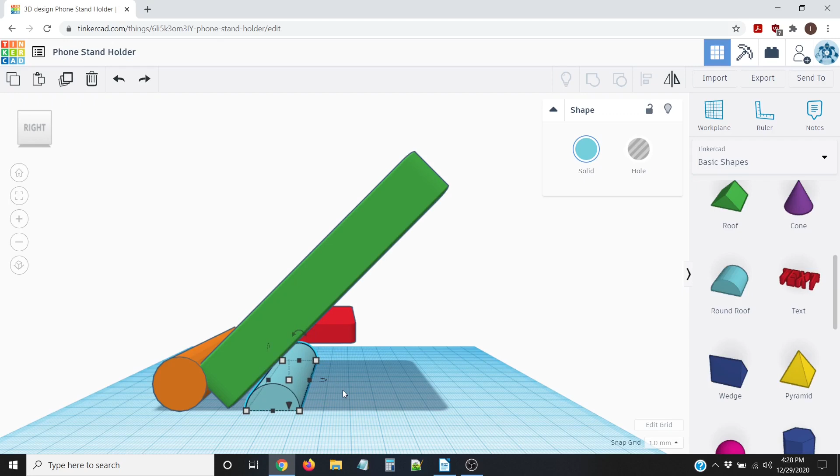I'm basically just going to eyeball moving this into this. So I've changed my view to the right view right here. I'm going to use my left arrow button on my keyboard to move this in just like this. I'm going to move it in so it basically meets these objects right here.

Now what I want to do is actually increase the size of this going from left to right looking this way. So increasing the size of the base going this way. So I'm going to increase it to 85 millimeters. I'll type in 85 and click Enter. So it's 85 this way.

And then I'm actually going to increase the size of this object going upwards. So I'm going to click that. I'm going to change that size. I'm going to change it to 35 millimeters. Type in 35, hit Enter. Oh, and that actually kind of messed it up. But if I click on this object and press the letter D on my keyboard, it'll move it up on the plane like that. So this is exactly what we want. We've basically got this base object connecting this object as well as that object. So we are almost finished.

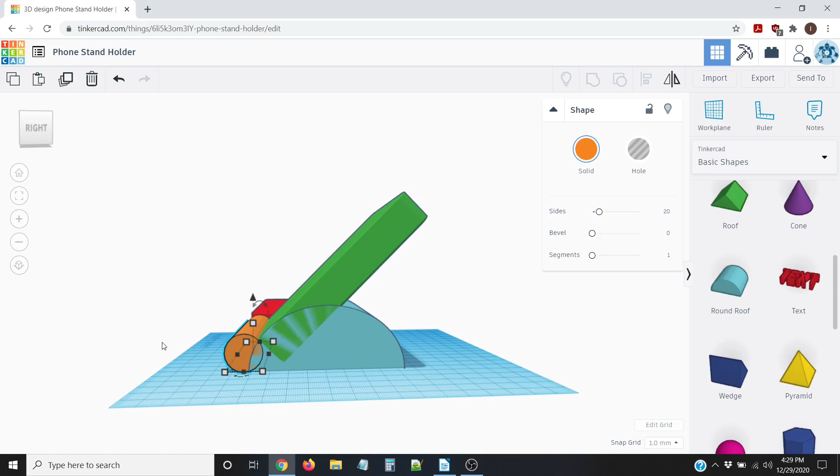The next step is to group all three of these models into one object. I'm going to highlight these and just make sure everything is nicely well aligned. Go up to the Align tool, and it looks like it's nicely aligned there, so we should be fine. So now I'm going to group these, so I'm going to highlight these using my left mouse button, highlighting all these, and then going up to this group tool and clicking that. And now these are all one piece grouped together.

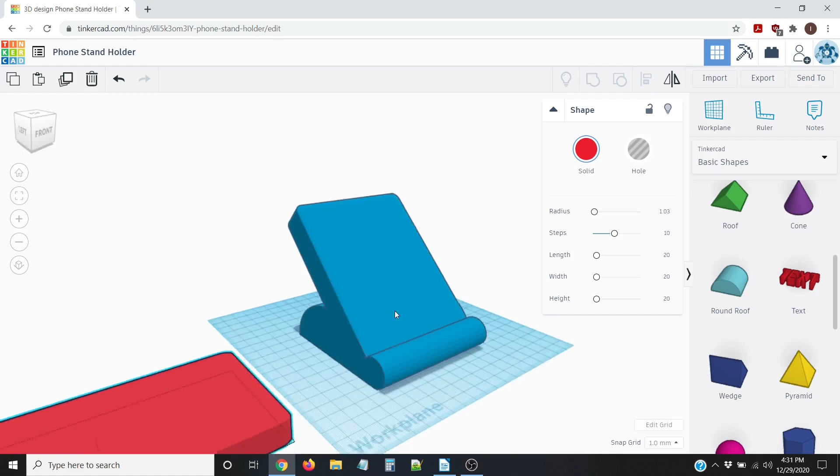And I'm actually going to change the color of it as well. Click on that. I'm going to change it to, let's see, maybe a light blue for the whole thing. That looks pretty good. So now we actually want to use this phone model to create basically a little ridge down here for it to sit. What I do is first turn this from a solid into a hole. I click like that.

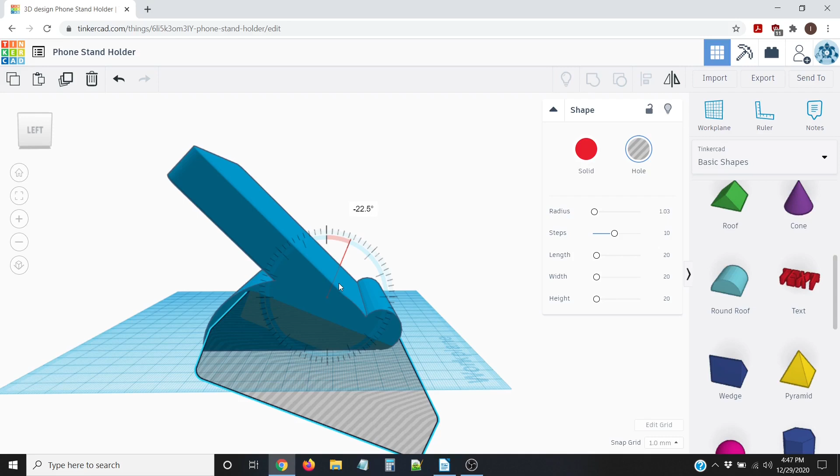And then I want to actually rotate this to meet that angle of this. I'm going to move this over like that to the work plane area. Move it in like that, like it's going to cut through it, basically. But now what I want to do is change my view like that. And I want to click on that tool and then click on this rotation tool right there. I want to change that from negative 22.5 to actually 45 degrees like that.

And now I'm going to use this cone tool to move it up in space like that. And I'm going to align it. So I'm going to highlight these both, click the align tool, and align it going this way so it meets this like that. So we're good with aligning it to the middle of that. I'm going to click out here. I'm going to click this. I'm just going to move it slightly in using my up arrow key.

I take a look like this. I'm going to use this cone tool and move it downwards, just ever so slightly like that, into the model. So then there's basically like a lip created.

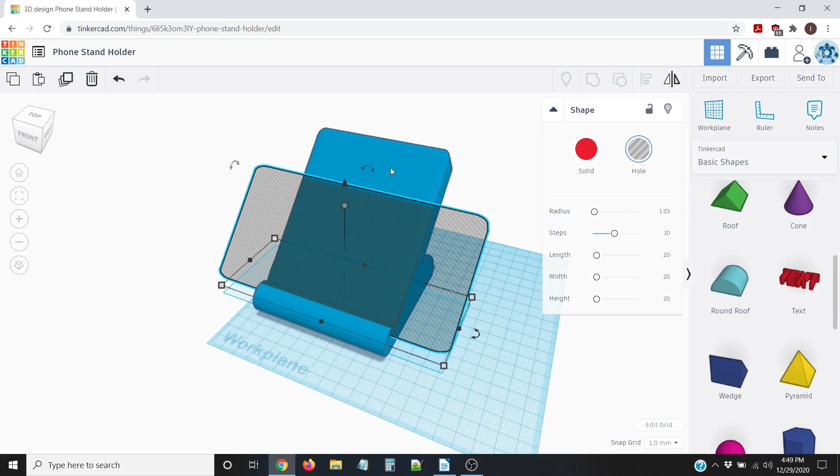Now I realize too that if I cut into this, I'm going to want to cut away this stuff up here too. So instead of trying to resize the thing, I'm going to use the duplicate and repeat tool to make a copy of this and just move that copy up here to cut away this part. So I'm going to do Control D, or up here you can click duplicate and repeat, and then we'll see where that copy ended up. Let's see. Up like that. Oh, okay. So there's the copy right there. So I'm going to do undo real quick, bring it back down like that.

I'm going to move that copy. I'm going to use my right arrow button, move it in like this, over like that. And then I'm going to use this cone tool right there to move it up, just like that. So basically they're going to be meeting each other. So I'm just going to kind of eyeball where this is going to get cut, and they look pretty close.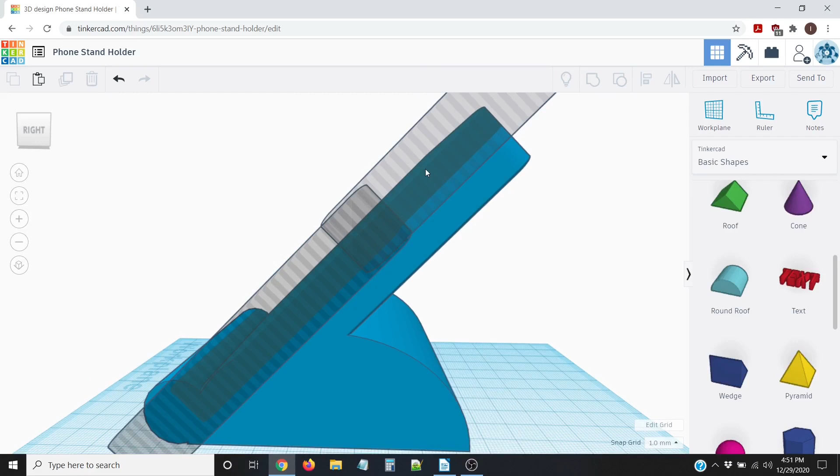So I'm going to take my snap grid off, click that off, zoom in. It looks like they're just about meeting. This is just cutting it a little bit more. So I'm going to zoom out a little bit, move my tool up like that. It looks like, yeah, right there. That's kind of where they're meeting. So now I'm going to group this and see how this looks. I'll highlight these both, click on group.

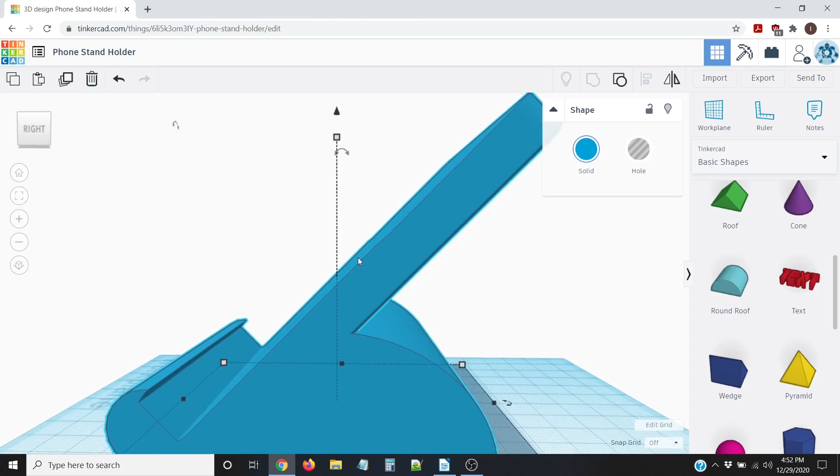Awesome. So yeah, that's perfect. That should work out really well. I can kind of see there's a slight edge like that, but that's not a big deal. So now as you can see, you should be able to use this to set your phone going left to right this way to watch movies or do homework or whatever, or set your phone up going up like this. And this should be fully 3D printable, and it might take a little bit of time to print, but what we can do is increase what's called the layer height of the print, which makes it print faster. It just means that you'll see the lines of the 3D print.

They'll be more prominent on the print itself.

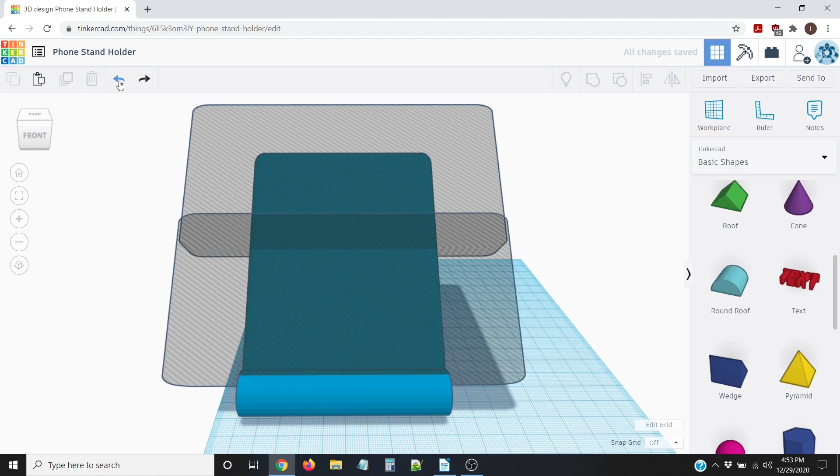Another way to accomplish cutting this up would be to go back in time, so clicking undo several times, going back before increasing the size of this model going this way.

I'd increase it to, let's say 100, let's do 125 just to be safe. Hit enter with the value you put in. Now I'm going to use this rotation tool again to rotate it 45 degrees going that way, and use this cone tool again to move it up in space, just like that.

So this works as well. But first what I want to do is align these two. Highlight that, align it, clicking that middle circle there, so align it to the middle like that. And this should totally work.

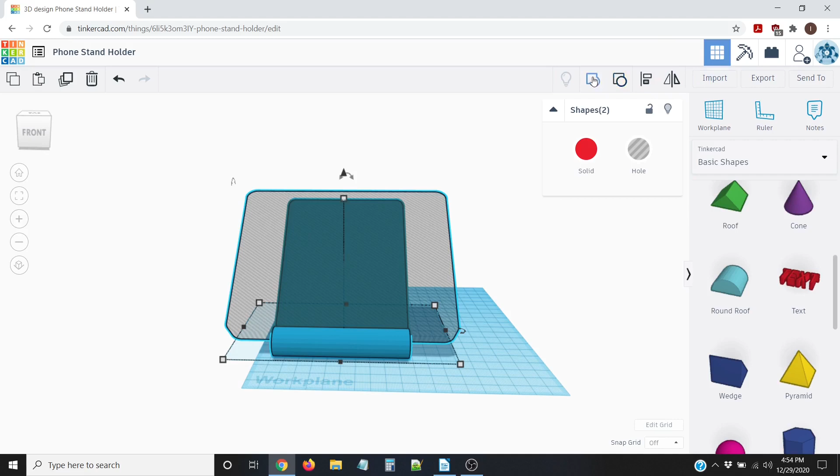Let's see what we'll do. We'll highlight these both and click on group. And yeah, that totally works as well. So there's definitely two options right there, if you need to increase the size of your model itself to cut out more parts of this.

And this should be fully 3D printable. I'm going to show an example of a print we did of this at the end of this video, just so you can see what it looks like after it's been printed.

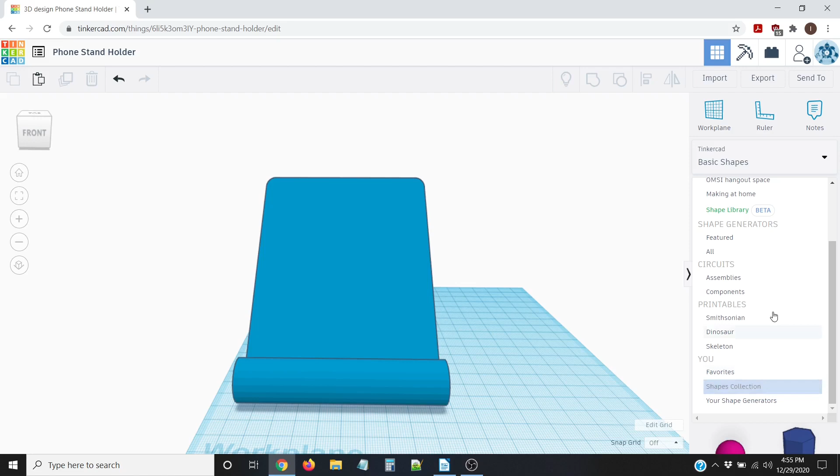So at this point, what you can do is actually customize this holder as well. Like we've done in the previous videos, the easiest could be text, but you could also grab potentially some of these other things, such as the characters, and fit something like the spectacles.

You could try to fit that into the model like this if you wanted, or the peace hand like that. You could grab that and have it sit off to the side like that, like it's doing the peace hand, but it's coming out from the back of the base.

So you've got a lot of different options that you can play around with. You can also add, say, flippers if you want to the model, like it's got feet, like that. And then you would align these and just combine them to this model.

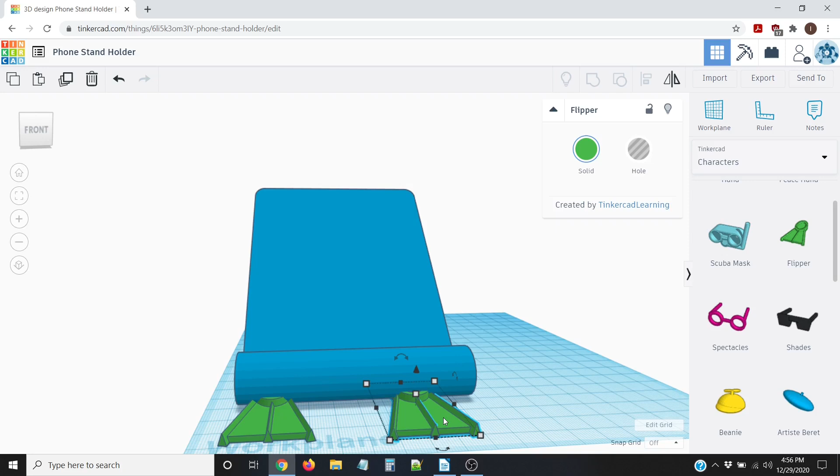What I'm going to do to keep it simple, though, is just to add some text. So I'm going to go up here, go to the basic shapes, and I'm going to grab the text tool. First, I want to change my work plane.

Click on the work plane tool right there. And then I'm going to change the work plane to be this right there. Zoom in and change it to be that angle, that plane right there. Click on that.

I'm going to grab my text. Now I want to change it to, let's see. Let's try some different text out. Delete that. I'm going to go down to the all shape generators, which is those text tools. So I might try, I'm going to use the script text because it looks pretty cool. Move this over like this.

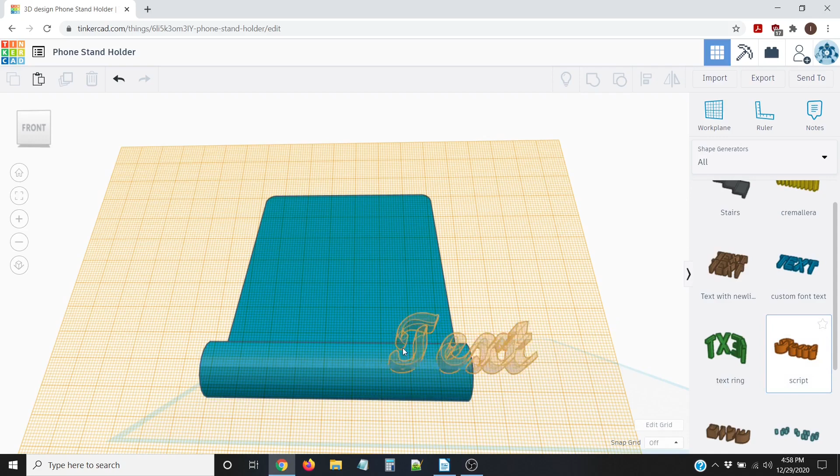I'm going to change it from font being script to, let's see what major snafu looks like. Oh, that's kind of interesting. Techniku, let's see what that looks like. Oh, that's pretty weird. Verdana, stencil. Maybe I'll try stencil, see how that works.

I'm going to change this now, the color, to a red, just to help me with the contrast of this. I'm going to change the text to say Ira, my name, which is IRA.

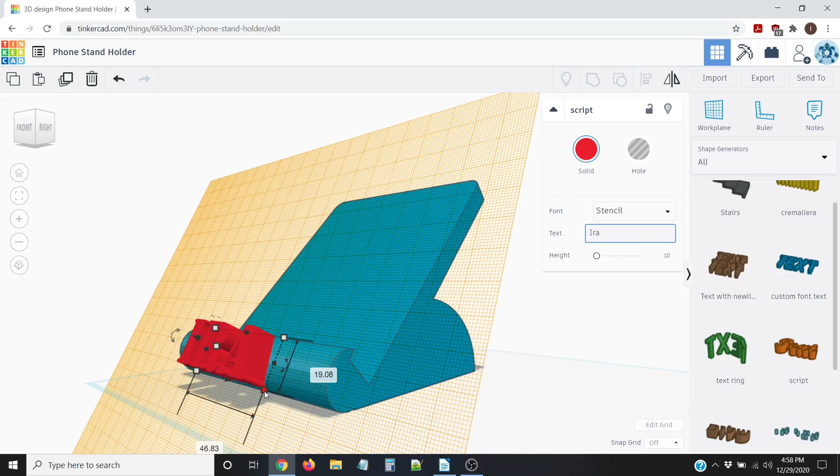Now what I want to do is actually change the size of this. Let's see, we'll do going this way, we'll change it to 15. And then we'll change it going this way, zoom out, we'll just change that to 40. Hit enter. Now, yeah, so that looks pretty good.

So now what I want to do is actually get out of the work plane tool. I'm going to click outside of the work plane tool like that. Oh, that's right, I could click work plane tool first, then click outside of that.

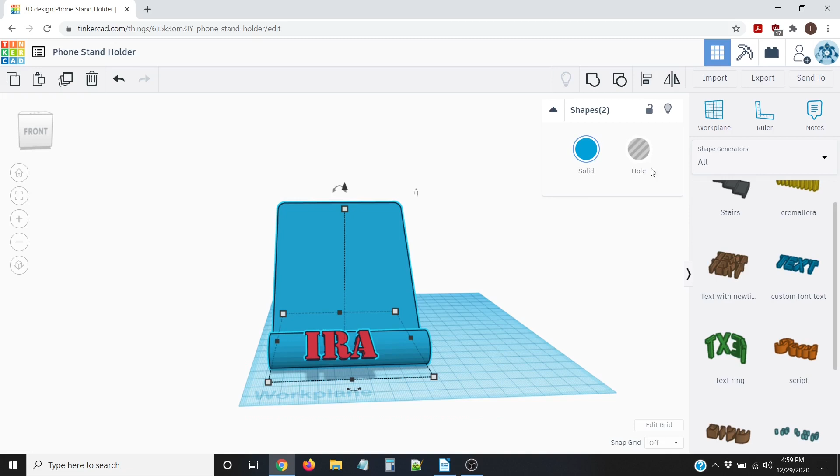Now I want to try to align this text to this model. I'm going to highlight that, click the align tool, and make sure it's aligned to the center like that. Click out here to get out of the align tool, then click on that text.

I'm going to use my up arrow to move it into the model itself. I've got the grid snap off, so it's going a bit slower, but I'm using the up arrow to make it go into the model, as you can see. I'm going to move it down just a little bit, like that. And I think what I want to do, instead of having the letters come out like that from the model, I want to have it cutting into it.

So I'm going to click on the hole tool like that. Now I want to group this text with this model, so I'm going to highlight these both and then group it.

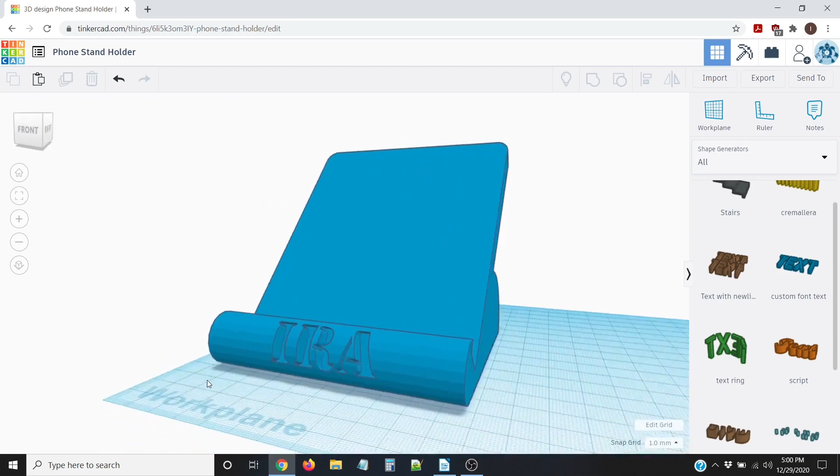Now, as you can see, I've got my name, which is Ira, I-R-A. It's going to be looking like it's being cut out of this, and it'll be printed like this. It's probably going to need what's called support material.

I'll show you guys what that would look like in the printing software we use. It would just need some support material right there, right there, right there, these areas where there's any overhanging sort of angles to the model like this. It's also going to need some support material in the back, going from there to there. But I'll show you what that'll look like in the next video.

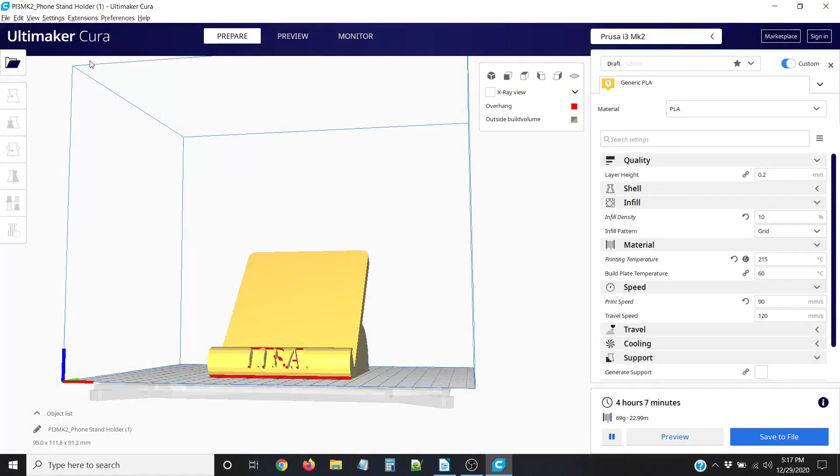So yeah, this is how you can personalize this model. This is what the model looks like in Cura. This is the software that we use to import models that you create and get them set up and ready for 3D printing. So it looks like, yeah, this should work.

It's going to take about 4 hours and 7 minutes to print, and basically all you got to do is click on Save to File. I save it to an SD card, put it in one of the printers, and then we'll print it out. So stay tuned in the next video for examples of things made in this video that we have 3D printed.

As you can see too, I'm going to flip this over like that, and you can use it to watch videos as well, or do your homework or read ebooks if you like doing that.